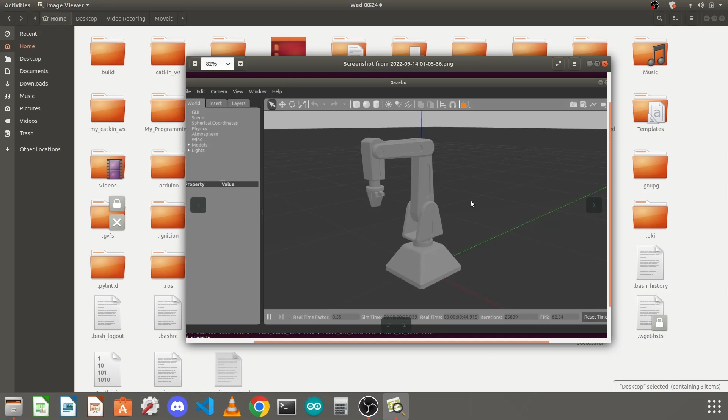In the last videos of this series, we configured the URDF file for this robotic arm, which was created using SolidWorks. We launched it in Gazebo and wrote some controllers—this is just a screenshot, but you can see my last videos. We created our own MoveIt workspace and added our robot arm URDF package, generated from SolidWorks, into the SRC folder of the MoveIt workspace. The package was containing only the simple URDF and STL files, so we first modified the CMakeLists.txt and package.xml files to add some dependencies. Then we modified the URDF file to add the transmission tags and the Gazebo controller. Then we created a joint trajectory controller YAML file to control the joints of the robot, and we created a custom launch file to load everything in a single terminal.

So in this tutorial, we will be creating a MoveIt package which will control the robotic arm using inverse kinematics, controlling the joints by planning the joint trajectories as per the environment around it. So just follow me along.

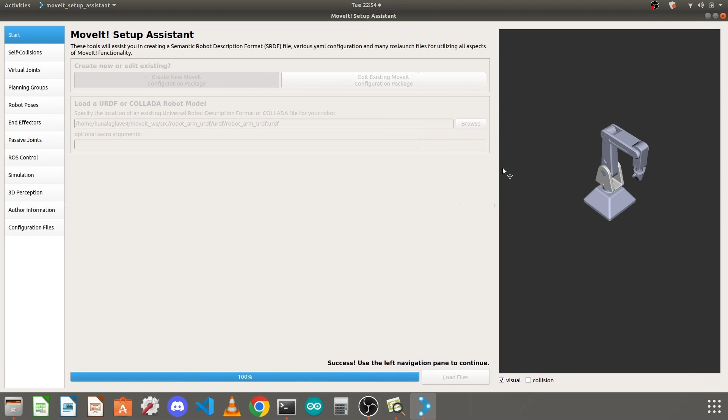Click on this, go to the URDF file—this is the URDF file that we configured in this tutorial. Just select it and click open. Once you open it, you'll find the path loaded here. Just click on load files, and it will show you the preview. You can drag it using the middle mouse button and rotate it by pressing the left mouse key.

If you don't get this preview, something is wrong with your URDF—you need to check your URDF file. So for me, it is good.

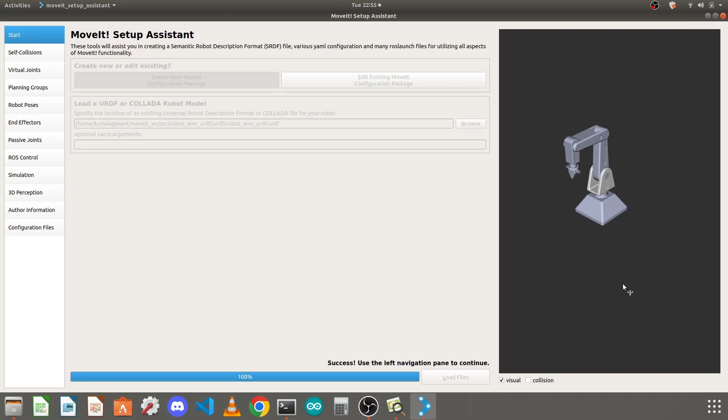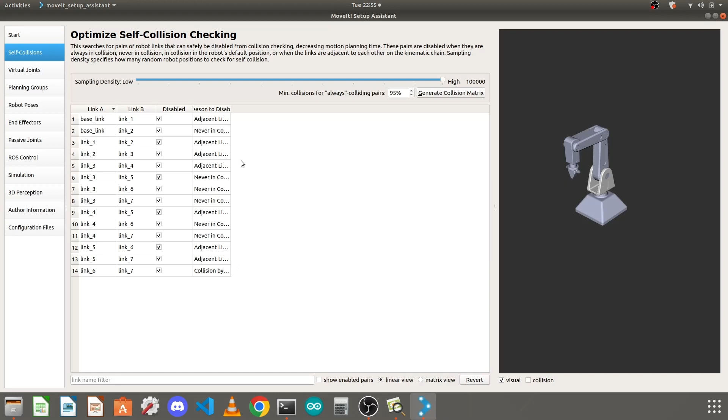Next, click on self collision. Here, set this bar to high and click on generate collision matrix. It will check which links will never collide with each other and disable collision detection for those links. For example, you can see here link A and link one—it has created groups that will never collide with each other. You don't need to pay attention to this.

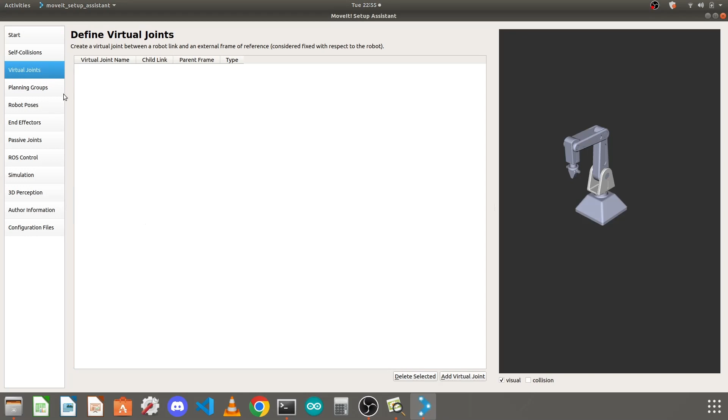Just go to virtual joints. If you haven't added that virtual joint, you need to add it, but if you do this, you need to change your URDF after. We will skip that and go to planning groups. Now, as we wrote different controllers for our robot arm and the end effector in this tutorial, you just need to create two different groups for the robot arm and the end effector. Click on add group, and name it arm_group.

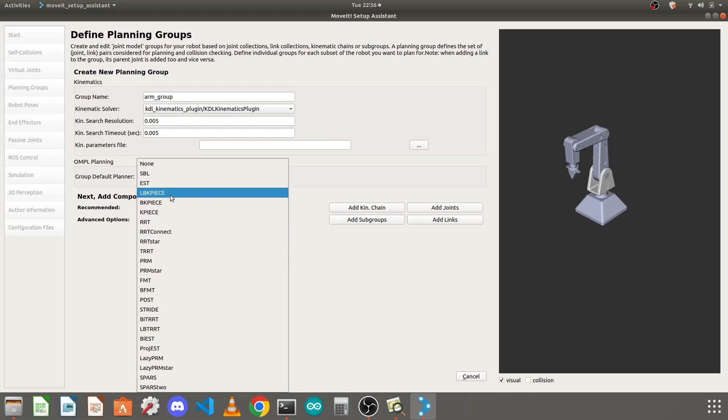For the arm group, in the kinematic solver, select KDL kinematics plugin. It is the default one. You can check the use of others on the ROS wiki pages. Now keep the search resolution parameter as it is. In the group default planner, you can select RRT, which is the default planner.

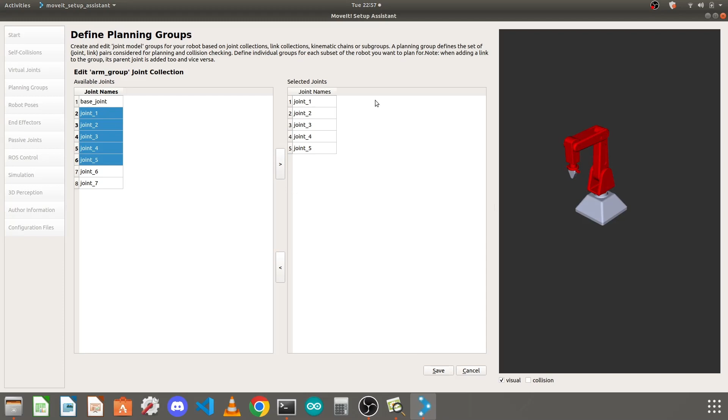Now go to add joints. Here you need to add everything from base link, I think from joint 1 to joint 5. Just press Control key on your keyboard and select up to joint 5. As our base link is fixed, we will not add any group for that. Just add it here and click Save. You need to press this key to add them to the selected move group or joint. Click on Save. We have added one move group.

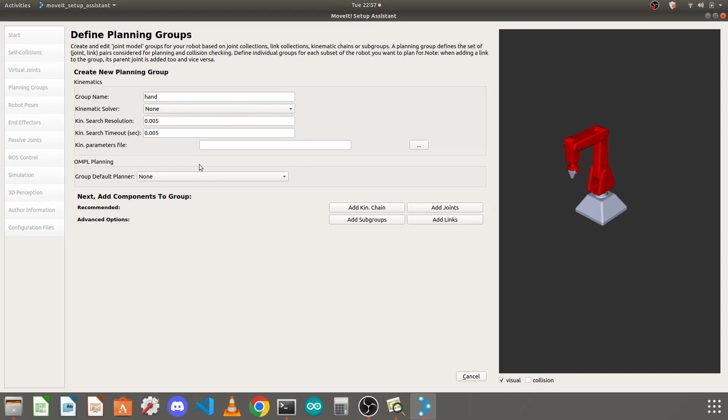We need to add another group for the end effector. Here, give the name, and since it is the end effector, we will name it as hand. You can name anything you want. For this, we will not select any kinematic solver as it is a basic mechanism. No planner will be selected here. We will just add the joints. Select joint 6 and joint 7 and click this button to add them into the joint group, then click Save. You can see here two groups are created.

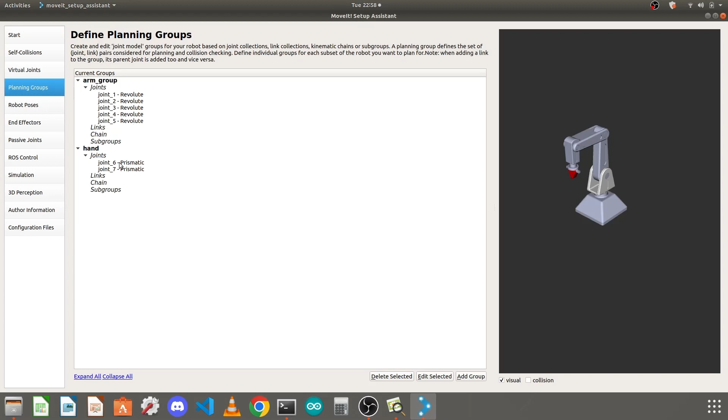Arm group has joints 1, 2, 3, 4, 5. Hand joints has joints 6 and 7. Now click on robot poses. What we do in robot poses is predefine some positions, like you may have seen in 3D printers, when you do a reset they go to position 0, 0 at X, Y and Z axis. Similar kind of thing we will be doing here.

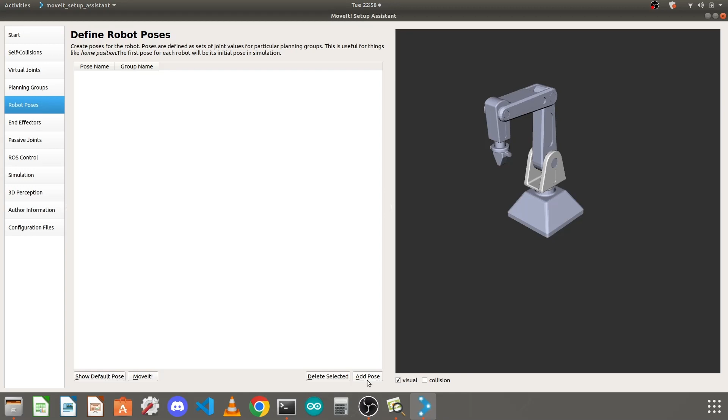So click on add pose. First we will select the planning group as this robotic arm. Before doing that, we will create it for the hand. For the hand, you can see one joint is completely closed and one is completely open, because the range of motion is from 0 to 0.03 for one, and minus 0.03 to 0 for another. So here we will save this as it is.

We will name it hand closed and click save. Again, click add pose, select hand group only, click on hand and type hand open, and open this joint to its maximum and this to its minimum. You can see the robotic gripper is completely open. Now save it. So we have completed adding the poses for the end effector.

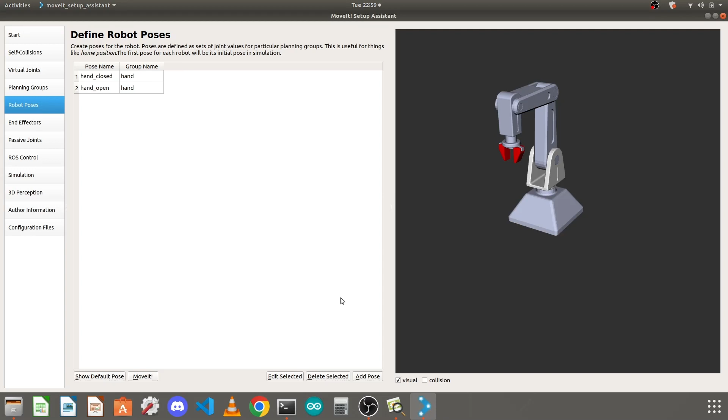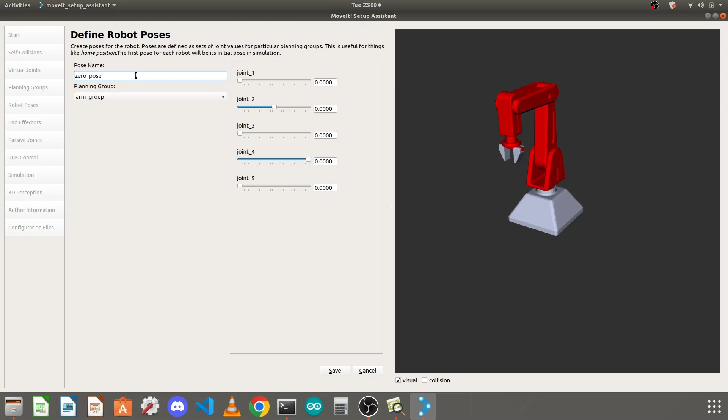Now we will add the poses for our robotic arm. Click on add pose again. Now select the arm group as the planning group. Name it as all zeros, name it zero pose, and save it. So it is the basic zero location of our robot. All the joints are at their zero state.

Now again add another pose. We will make the state where all the joints make the robot arm appear straight. So go here and take this... as you can see here, it is moving in reverse.

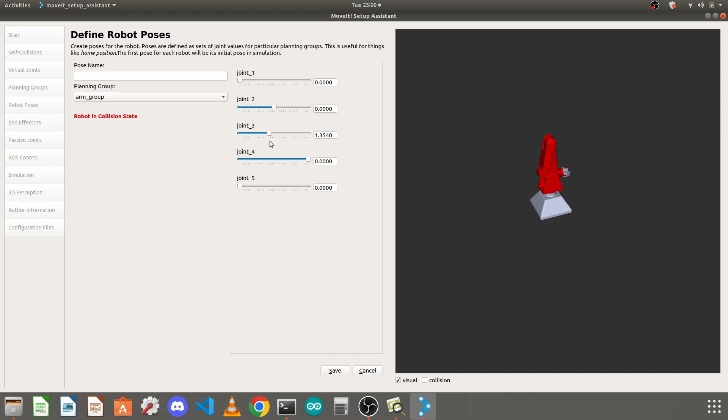So it is an error in our URDF file. If this happens, what you need to do is cancel now, and go to your Catkin workspace and open that URDF file that we used for the MoveIt Assistant. So open this URDF file.

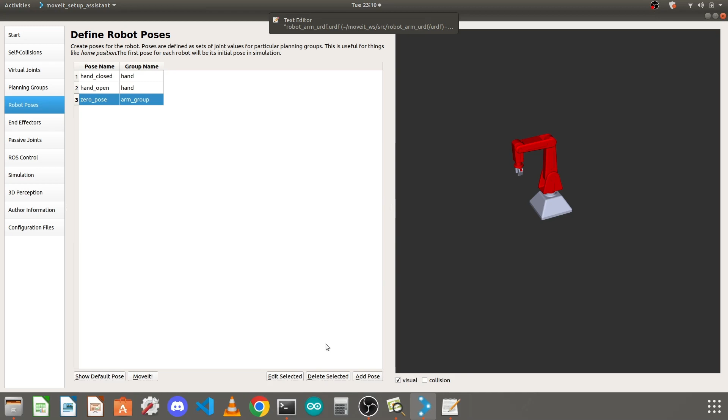So here, if you go into add pose, you can see we have an error with joint 3. Joint 3 should rotate the opposite way, as it is currently rotating this way, it should rotate in reverse, it should rotate like this. Currently its zero position is this, and its 3.142 position is like this.

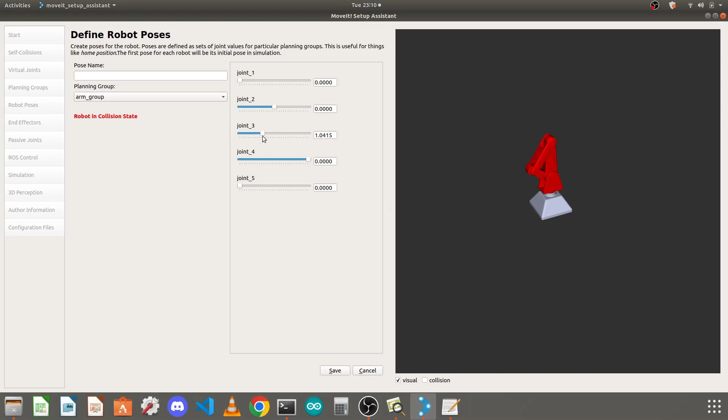So what we need to do is, you can see it is moving clockwise when we give it a positive value. So we need to change the range of this joint from 0 to 3.142, to minus 3.142 to 0, so that minus 3.142 will be the reverse position, and it will move from this to this. So just go to your URDF and locate joint 3 in your URDF file.

Like you also need to check other joints if there is any error. We will do that also. So you can see here is joint 3. The lower limit is 0 and upper limit is 3.142. You just need to type it here like...

I will just give a simple trick. Just take this value, Control X, and paste it here and give it a negative sign, then add 0 value here.

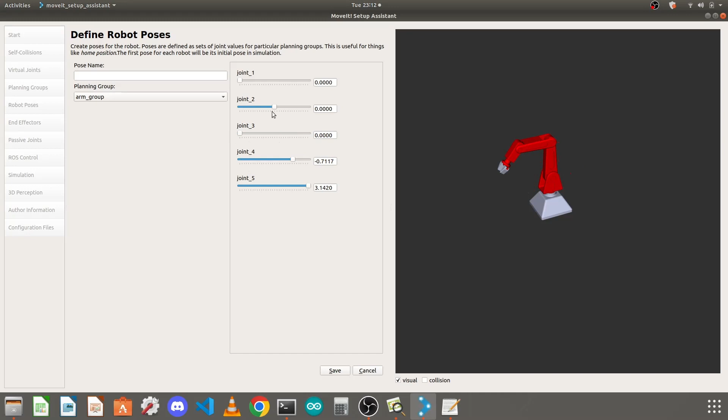Before closing this URDF, just again go to MoveIt Setup Assistant and check if other joints are working correctly. So this is working correctly. Only I have a problem with this. This is also working correctly as desired, and this joint is also working correctly. Again, you can see it is only rotating in 180 degrees, but I want it to rotate about 360 degrees.

So again, I will go to joint 1. Here joint 1, I will double this value. It is like 3.142, which means it is 180 degrees. So we just need to set it to 360 degrees. Type it here like twice the value, 6.284, and press save.

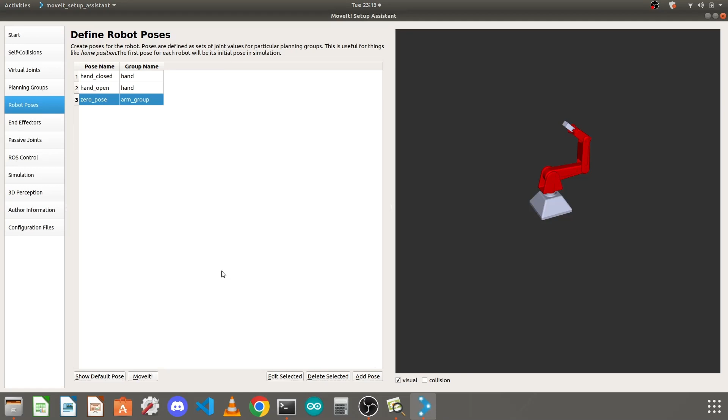Now we are done with editing the URDF file, so we can close this. What we have done here is we need to start again. So just cancel it, go to that terminal and press Ctrl C, then press the upward arrow key. The command will appear again. Press enter.

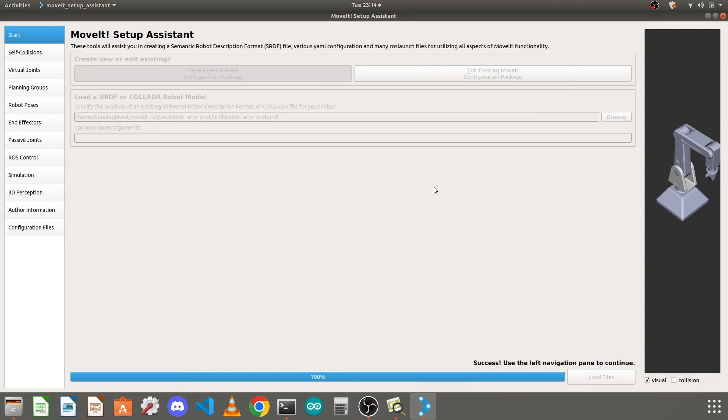Again, do the same steps. Create new package, browse, go to your Catkin workspace. Load the files. It is successfully loaded. Go to self collision, set it to high, generate collision matrix.

Click on virtual joints, we need to skip this. Go to planning groups. You can just expand this.

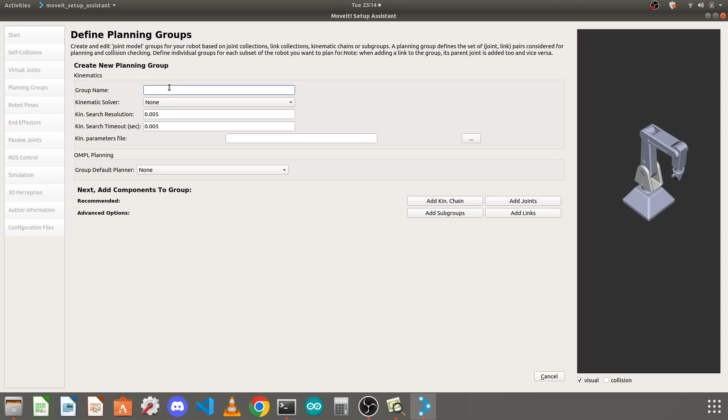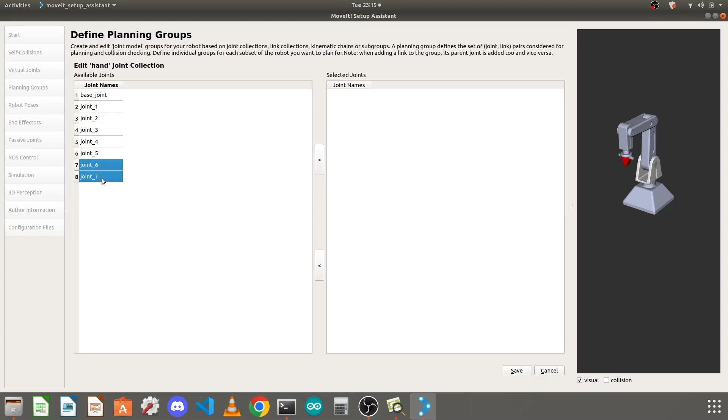Click on add groups. First of all we will add a hand group for this end effector. So type here hand. Don't select any kinematic solver, don't select the planner. Just add joints and select these two joints which are from the end effector, add them into the group, and click on save. Next, we will add a group for the robotic arm.

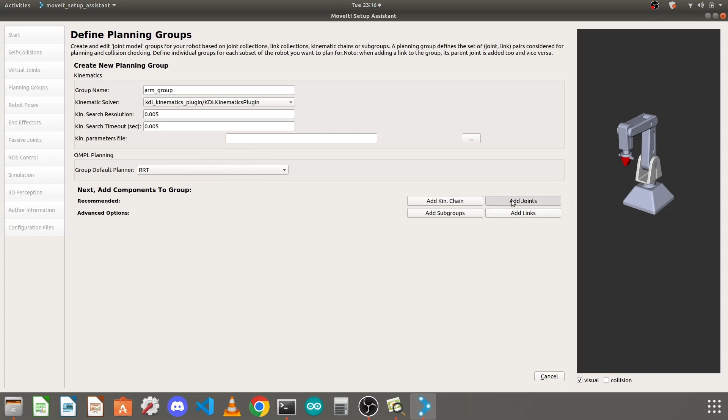Name it as arm underscore group. Select the kinematic solver as KDL, KDL kinematics plugin, which is the default. For the planner, select RRT, which is again default, and click on add joints. In a robot arm, add joint 1, joint 2, joint 3, joint 4, joint 5. The base joint is fixed, so we will not add it into the planning group. Next, click on save.

We have added our planning groups. The hand group contains joints 6 and 7, and the arm group contains 1, 2, 3, 4, 5. This is because we have written different controllers for these two groups. For the end effector we have a different controller, and for the arm we have a different controller, as you can follow this tutorial here for knowing about that.

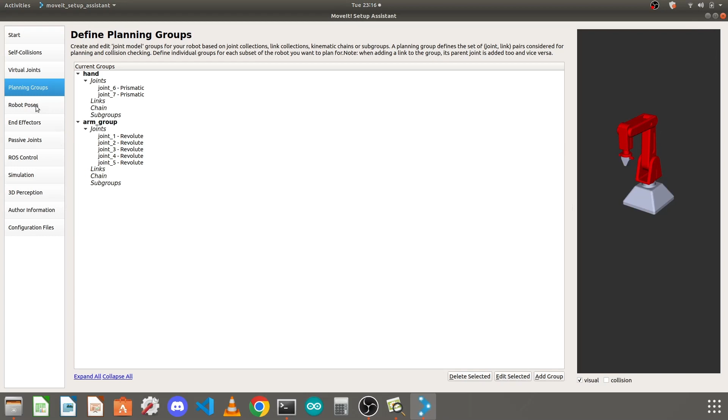Next, go to robot poses, click on add pose. This time your URDF should function properly. So again, we will add a pose and close. We are just defining the default poses.

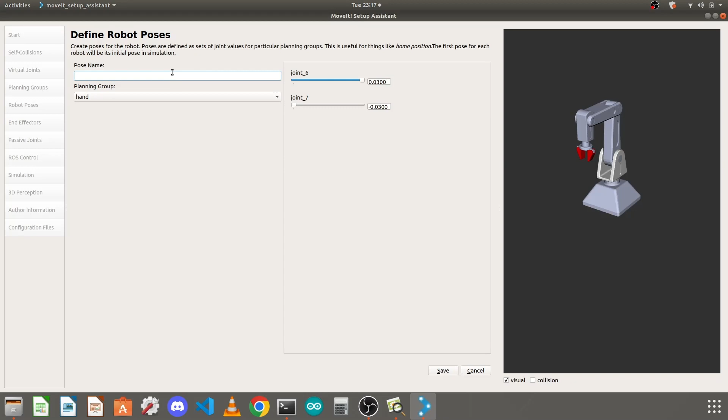Click on save, and we will add another pose for the hand group that will be the open state, as explained at the starting of this video. We will name it hand open and click on save.

Again, click on add pose. This time we will add it for the arm group. You can see the links in the arm group are getting highlighted as red.

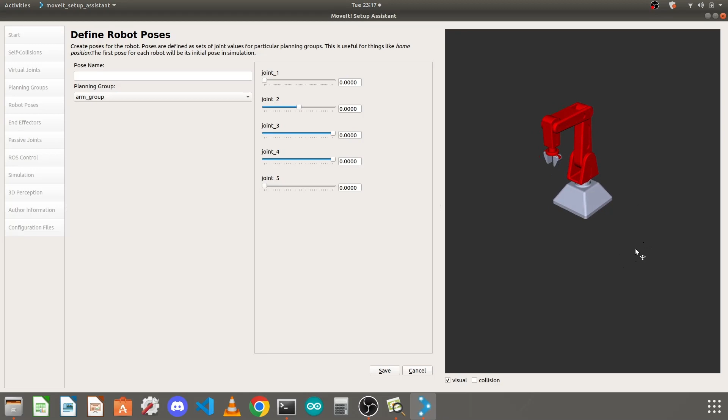Now you need to save this state as it is, as a zero state. So we will name it as zero pose, which states that all our joints are at zero state or zero angle.

You can see here, click on save, add another pose. We are creating this pose so that we can call it from any Python script. Now we want to make this robot straight up. What I mean by Python script: we can write a Python script to control this robotic arm, and in that we can call these robotic poses to set the robot in any state.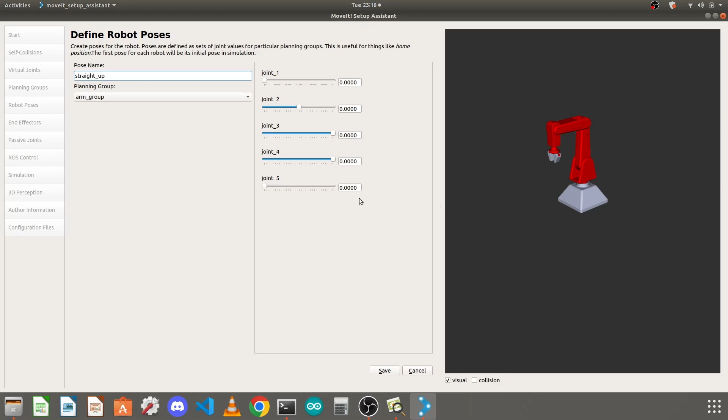We can also give the joint angles, but it is always convenient to have some default poses. So straight up means we need to make this robot arm stand up completely.

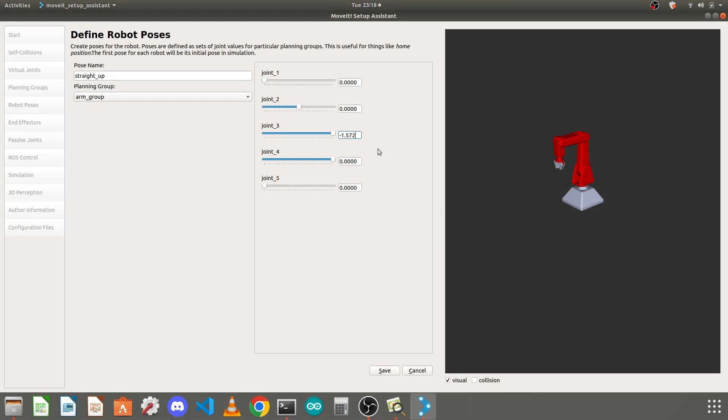So this is joint 3. We need to set it to minus, as we have set it from 0 to minus 3.142. We will set it at minus 1.572 and click here, so it is now at 90 degrees. Again, we need to do the same here, minus 1.572, so it will again go to straight up.

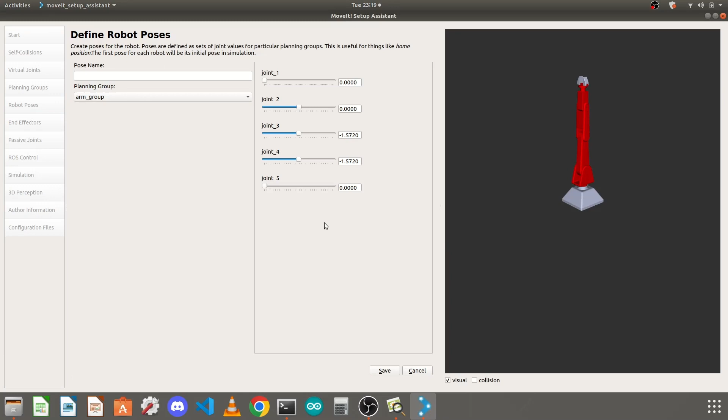Save this. Now we will again add another pose, like to pick some objects. We will now set it manually. You can use these sliders.

Later on, we can just use the inverse kinematics to take it to any coordinate. At the base of this robot there will be 0, 0, and you can take this end effector to any position from that origin, anywhere you want. That will be done using a Python script, which is called a node. So we will save it. We will also rotate this to 90 degrees, 1.572 radians, and click on save.

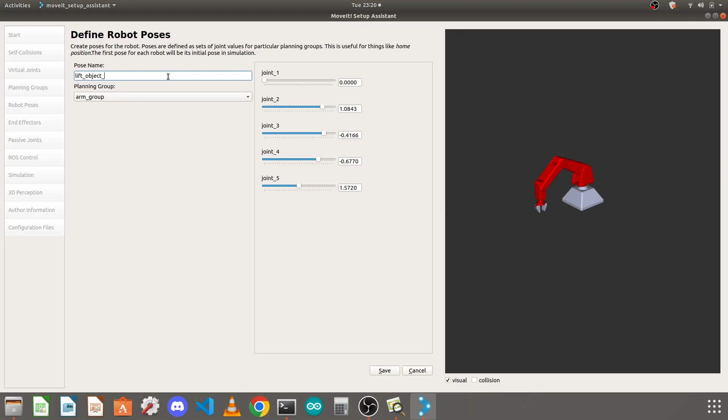Okay, so I will name it as pick object pose and click on save. Now the next we will add is lift object pose, and we will just lift the object just like we had lifted the object and save it. And again, we will add another position.

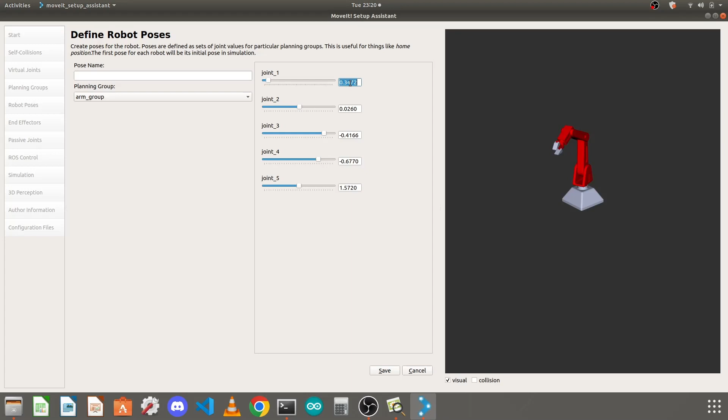Again, you can see this joint is now rotating 360 as we modified our URDF previously in this video. So I will again set it here like 3.142 and name it as deposit or, yeah, okay, I will name it something like opposite pose. You can name it anything, but I will just name it like this. Save. And again, I will add another pose.

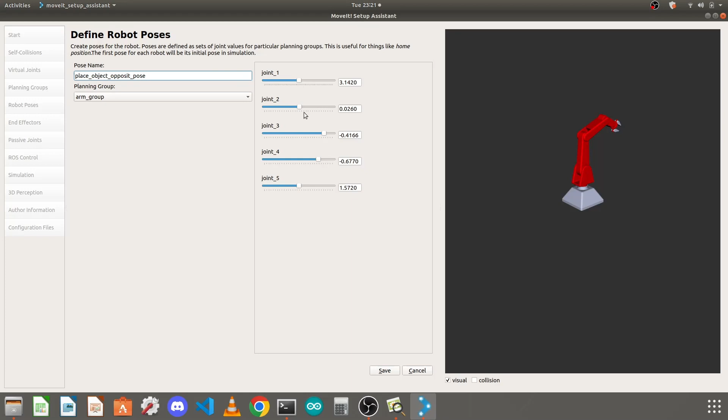Place object pose, and just make the robotic arm place the object there and save it. Now, these are enough default states for our robot.

We will go to end effector and we will add an end effector. We need to name it as EE. We have named the group as hand, so we will name it as hand end effector. For end effector group, we will select this hand, which was the end effector group. Parent link, we will select as link 5 because the end effector is connected to link 5. Parent group, you can leave it blank, or you can select that ARM group. I will keep it blank.

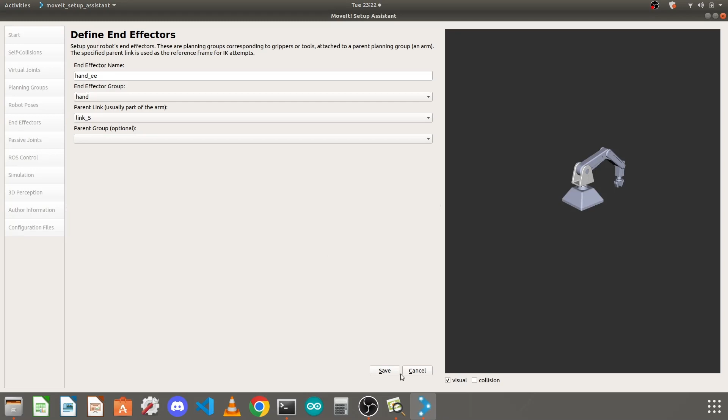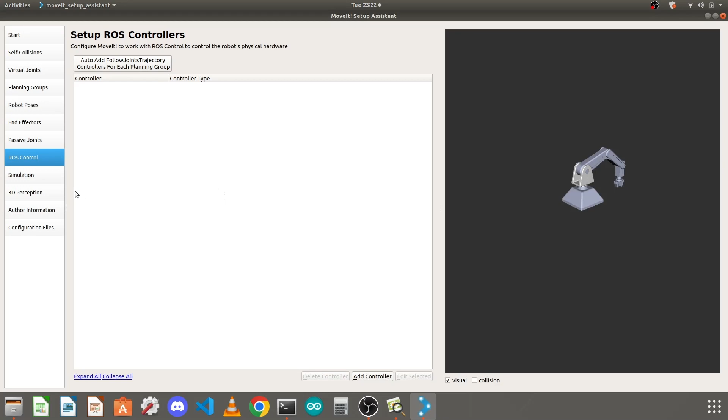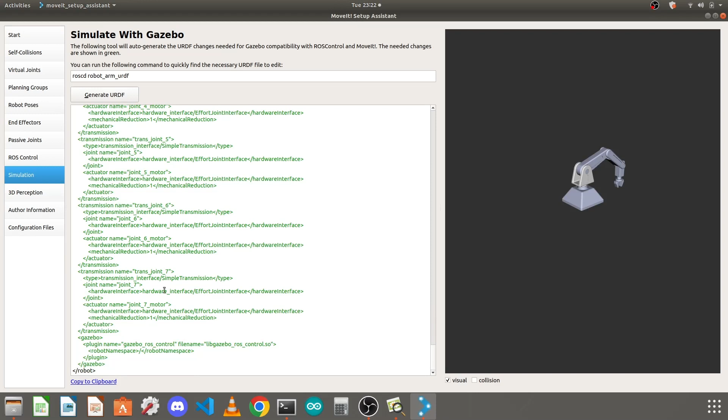Click on save. Passive joints are the joints which are never controlled or powered, but we have all joints controlled, so we will do nothing here. Go to ROS control. Again, you can add some controllers here, but I prefer to write them manually. In simulation, if you want to generate a new URDF, you can copy this and replace the URDF, but we will not do that because we have already configured our URDF, and this will create a lot of errors if we use it. Go to 3D perception.

We are not using this. Go to author, and if you don't add author and email, MoveIt will not allow you to generate this package. So you need to add it here. Email ID, it can be anything. It doesn't check whether it is a valid email ID or not, but it is good, it gives the information of the author. So sorry, I will add one dummy email ID. Okay, and go to configuration files.

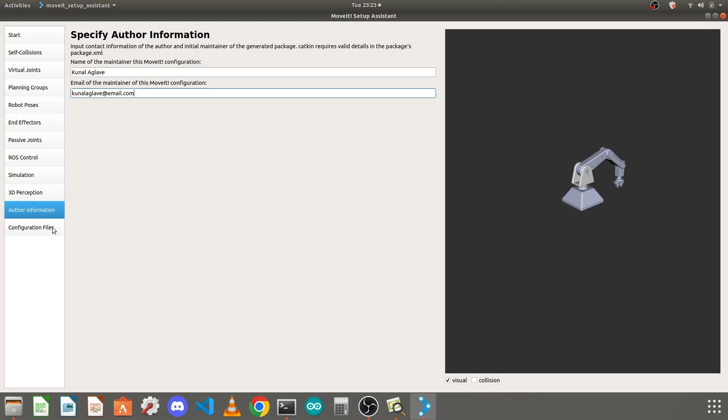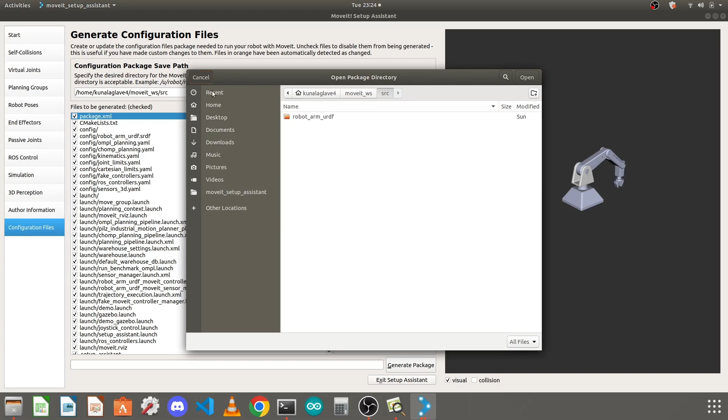And now here we are already in our MoveIt workspace. Just take it into the SRC folder. You can also browse from here. Now, as I had typed, I am already in SRC, and I will cancel and just give slash and type the folder name or the package name which you want to generate. So I will name it as movit_robot_arm_sim and just click on generate package.

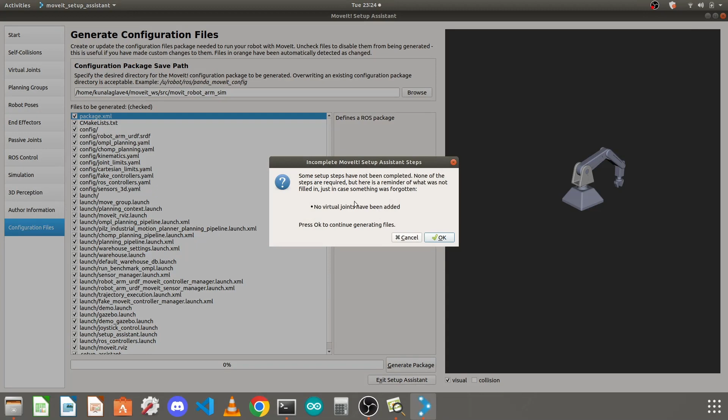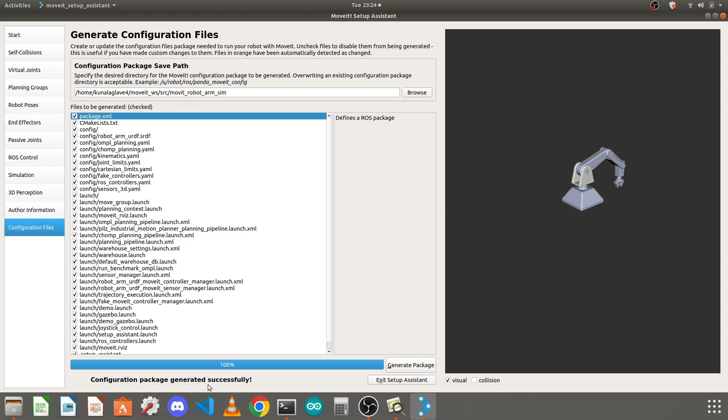It will give you a warning that no virtual joints have been added, but we will proceed. Click on OK. So configuration package generated successfully. We are done with our package. In the next video, we will write the controller for controlling the joints; a MoveIt controller we will add. You can check the generation status. You can come here and you will see the MoveIt package is added, the move group is created and different files are created. There are some default files like gazebo.launch and demo.launch, and there is a config folder containing different controllers.

So in the next video, we will see how to configure this package to control our previously created RobotArm URDF package.